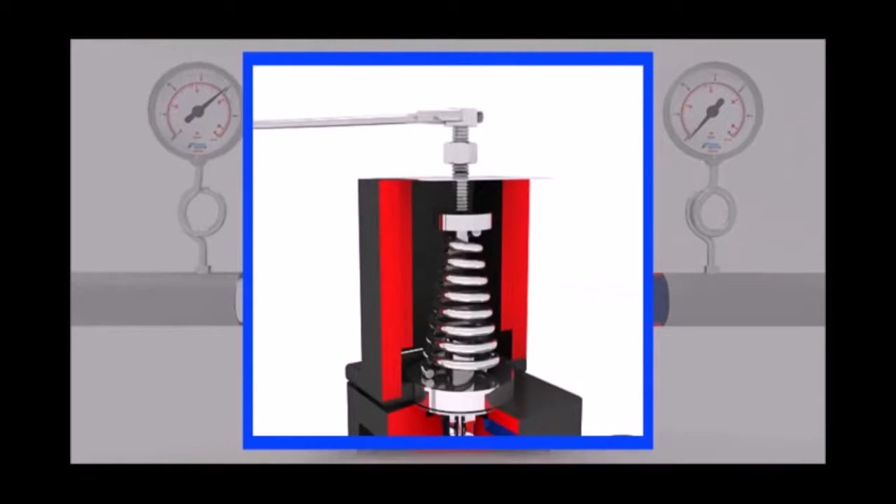Steam remains accumulated in the main valve chamber. Tightening the pressure adjustment bolt compresses the pressure adjustment spring.

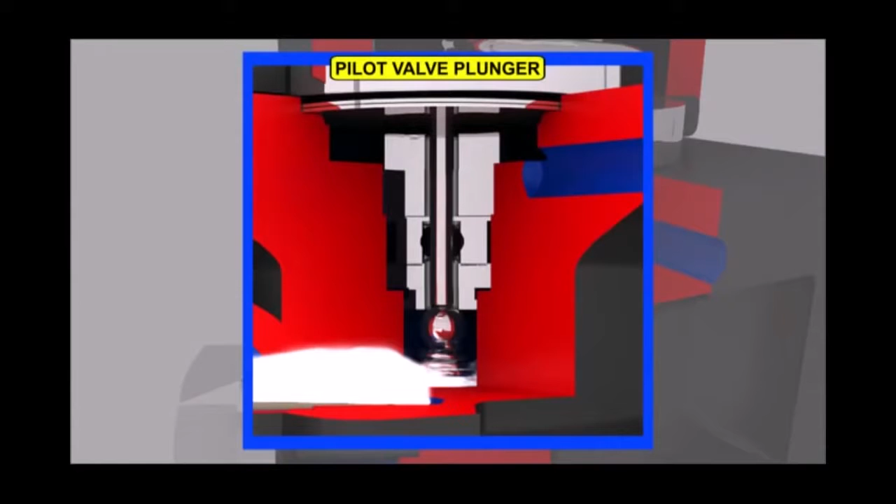This results in deformation of the pilot diaphragms, which in turn pushes the pilot valve plunger and SS ball against the spring located below, causing the pilot valve to open.

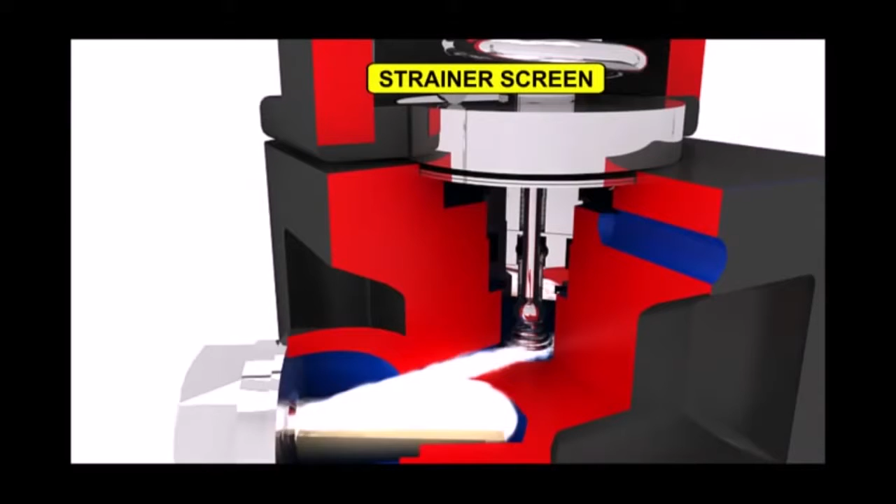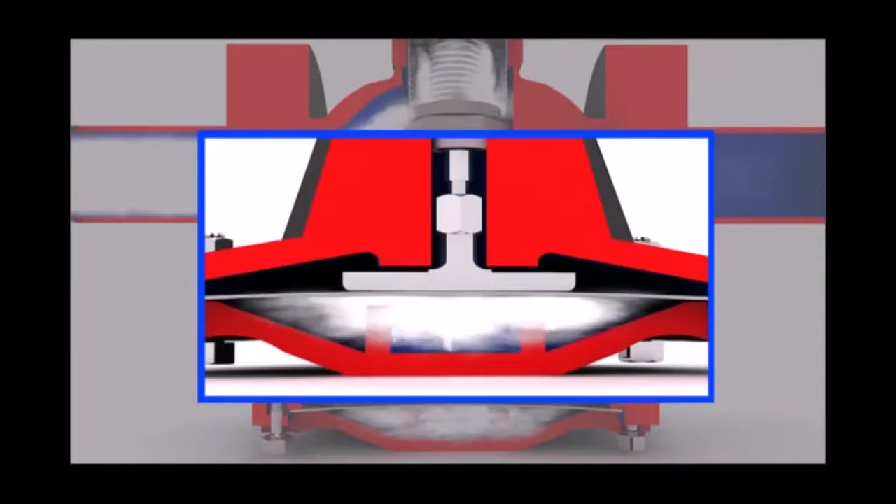Accumulated steam in the main valve chamber enters the pilot valve chamber through the strainer screen, called control steam. This results in deformation of the main diaphragms, which in turn pushes the push rod upwards and opens the main valve against its return spring and the supply pressure.

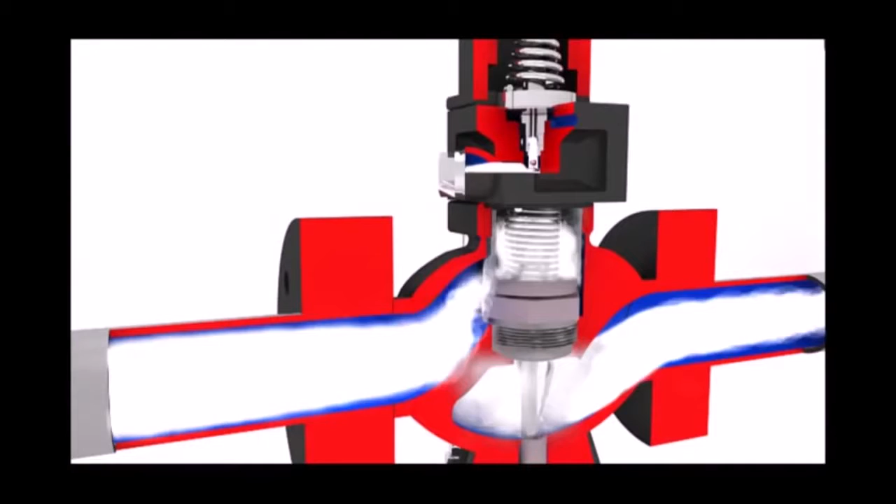Now steam starts flowing to the downstream line through the main valve opening. Steam flow through the main valve increases the downstream pressure. The downstream pressure acts through the balancing or feedback line below the pilot diaphragms.

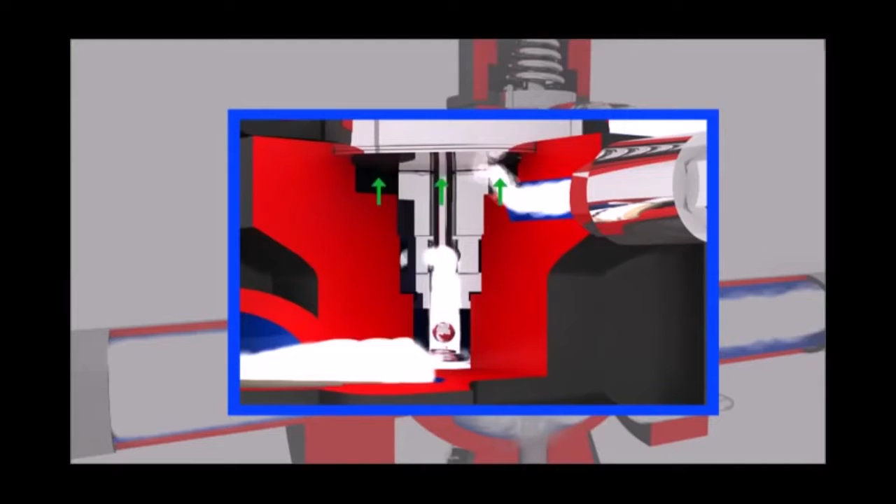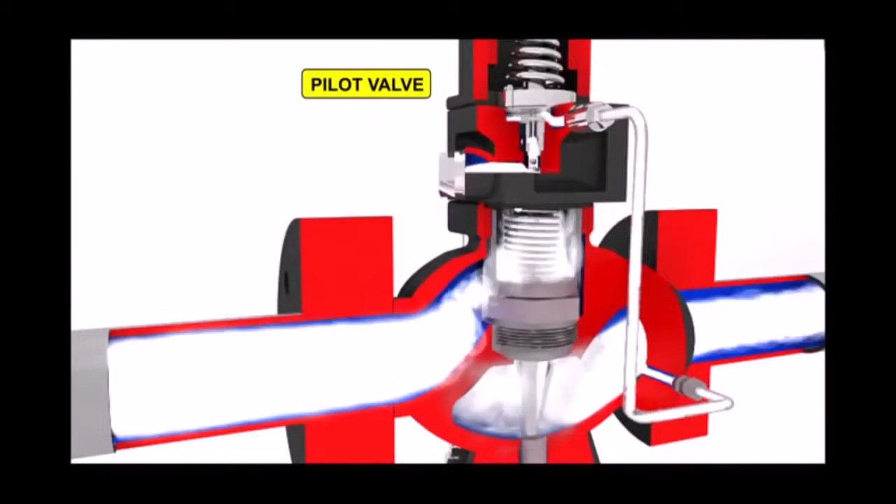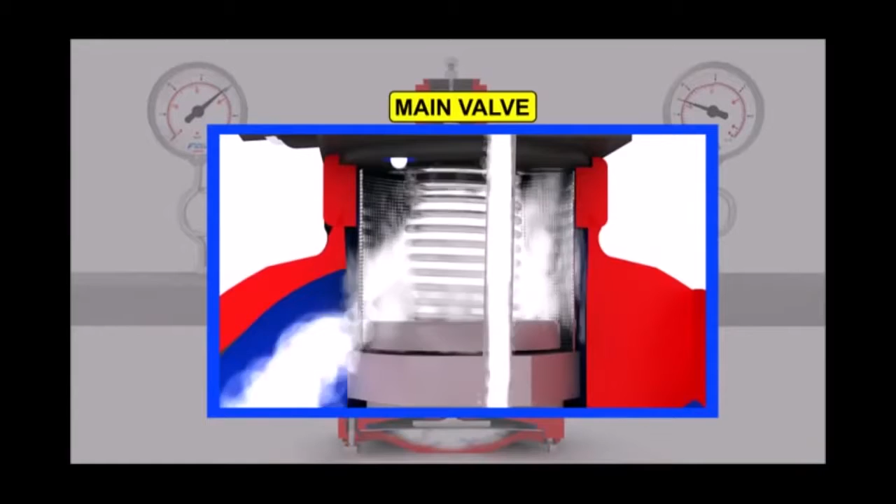When the upward pressure of feedback steam on the diaphragm balances the downward force of the spring, the pilot valve throttles. Steam passing through the throttled pilot valve maintains control steam pressure under the main diaphragm and positions the main valve to pass just enough steam to achieve the desired downstream pressure.

To achieve the desired downstream pressure, tighten the pressure adjustment bolt gradually.

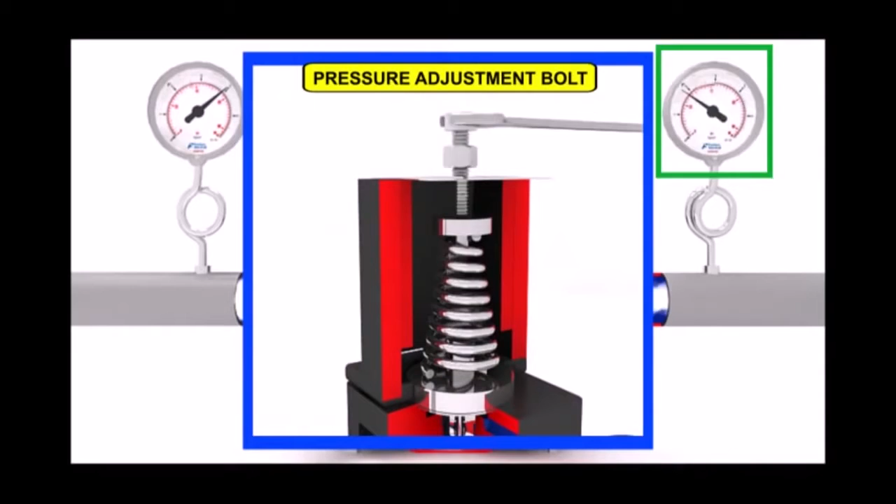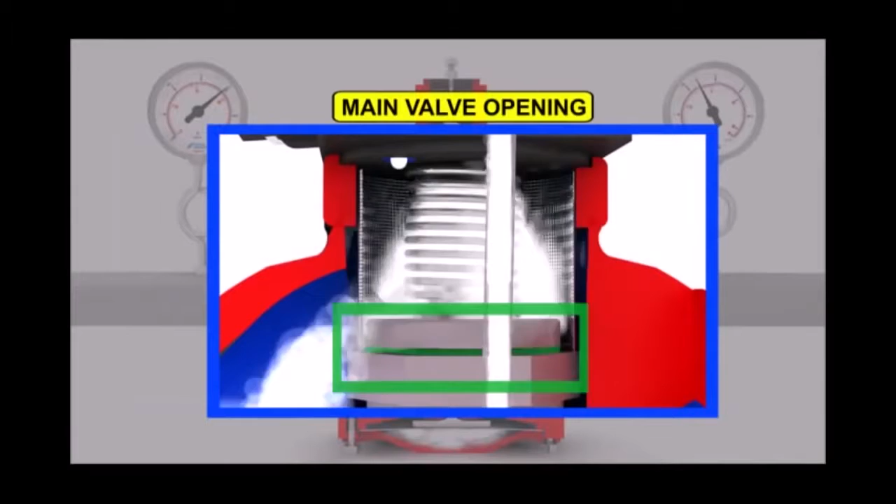Once the downstream pressure setting is done, an increase in the downstream pressure caused by a reduction in the steam load will move the pilot valve plunger upward and reduce the control steam flow under the main diaphragm, which in turn reduces the opening of the main valve and maintains the set downstream pressure.

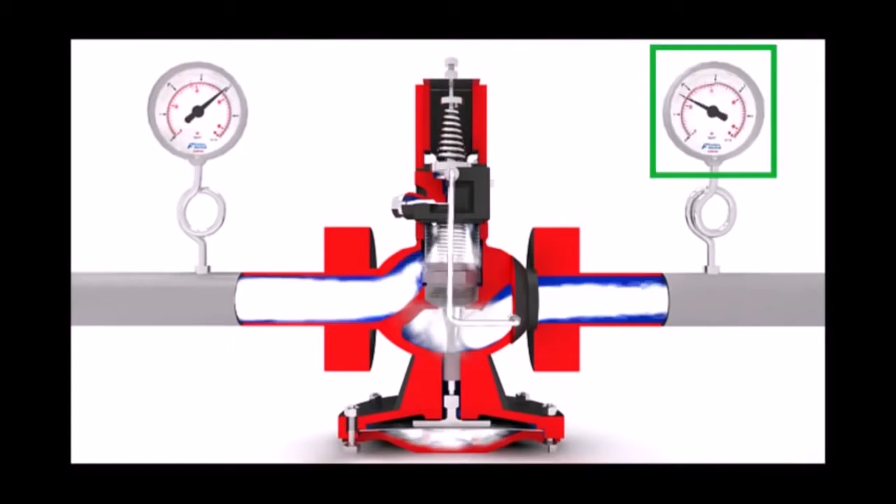A decrease in the downstream pressure caused by an increased steam load will move the pilot valve plunger downward and increase the control steam flow under the main diaphragm, which in turn increases the opening of the main valve and maintains the set downstream pressure.